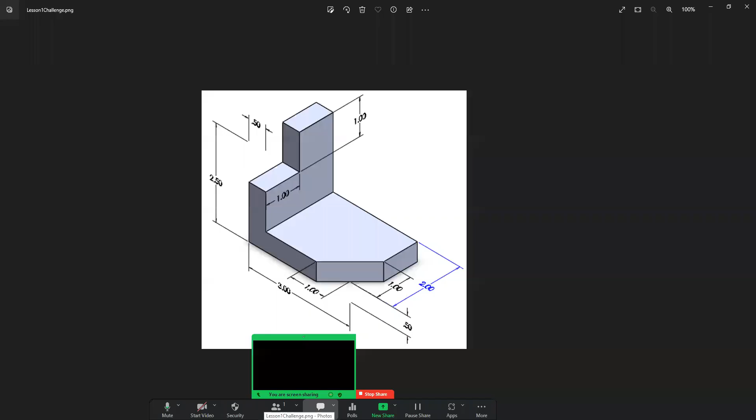First thing we need to do is make a 3x2 rectangle. That's going to make up our base. So we'll just make a new part.

I'm going to go into options. Remember, I always have that issue with ISO and ANSI, so I'm going to change it over to ANSI. All right, now we're good.

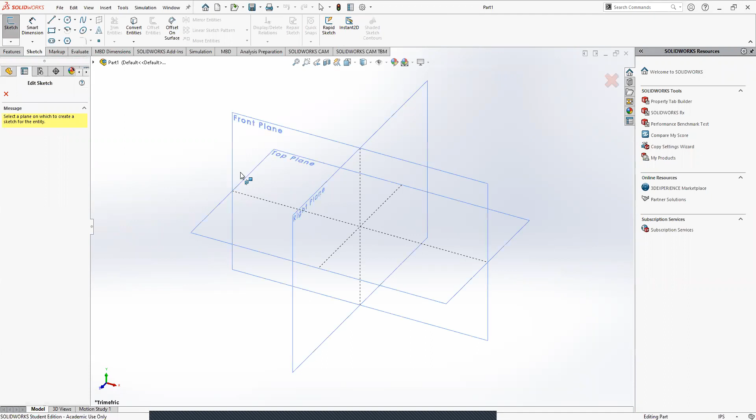So let me start a sketch. This one's the rectangle laying down, so I'm going to make it on the top plane, and when I extrude, it'll look like it's lying down. So it is 3 long, 2 wide.

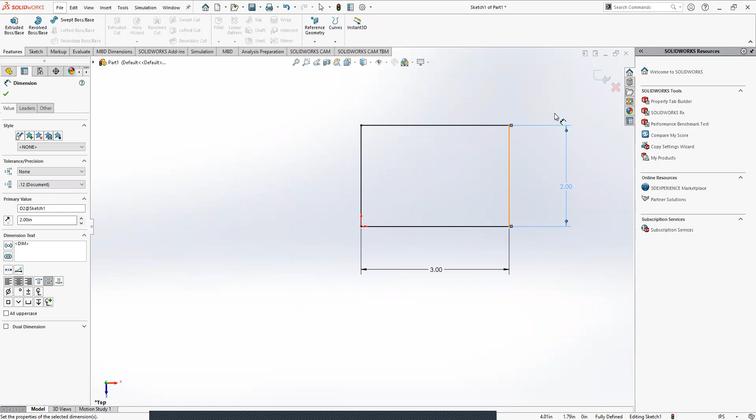Now let me double check how thick I need to make it. All right, looks like I need to make it... oh, notice all my lines are black - that means everything's fully defined. That's good. So now I'm going to extrude it, and I checked it's 1/2 inch thick. All right, there we go. Looks a little thick, let me just check my feature. Nope, that's correct. So there is our bottom rectangle.

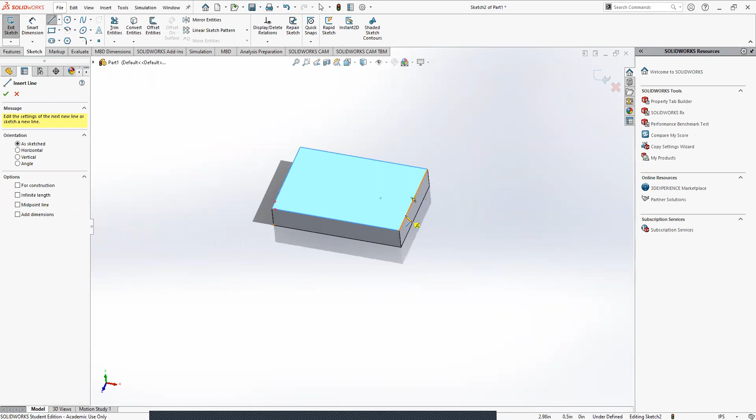So now we need to cut a corner off it. I'm going to go into sketch, make a sketch, and draw a quick triangle here. Notice these two lines are fully defined, so I only have to worry about this one - you can tell because if I move it around, that's the only line that'll move. Let me check the dimensions. Looks like both legs are going to be 1 inch, so that's nice and easy. I'm going to do 1 inch, 1 inch.

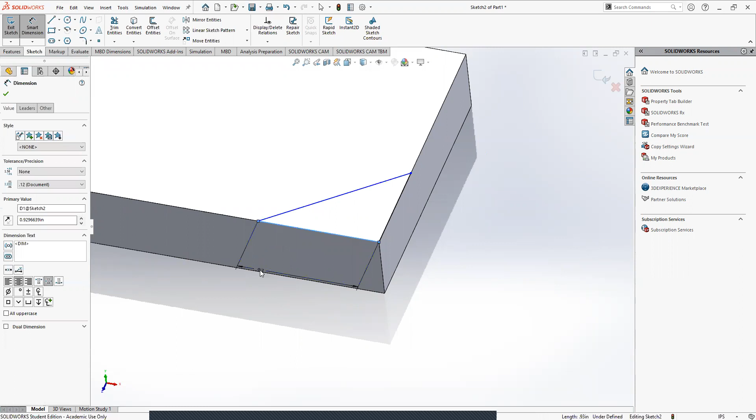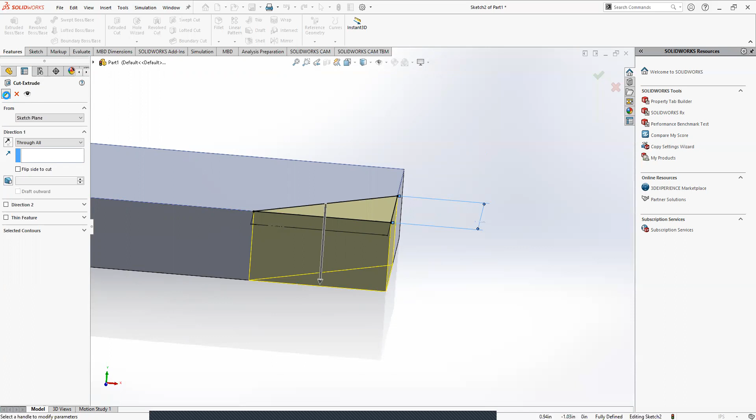Now this I'm going to want to cut, so I'll go to extruded cut. This was 1/2 inch thick, so if I cut it 1/2 inch deep it'll cut through everything. But since I'm cutting through everything, I'm just going to put through all. In this case it doesn't matter, but if you're cutting all the way through something, usually I like to just put through all rather than worry about getting the right distance. All right, now we have a rectangle with a cutoff corner.

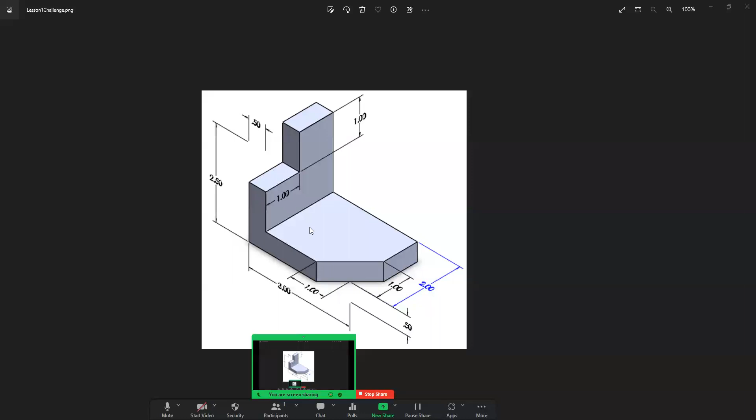Good start. So now we need to worry about that part standing up in the back. Before I start a sketch, I'm going to check on the dimensions. Fortunately, you can't see my screen when I'm looking at it, but it looks like I'm going to need to extrude it - or hold on, we'll do this.

Okay, notice from the bottom to the top it's 2.5 inches. Now this is somewhere you might get messed up, because this part here is already 1/2 inch thick. I plan on starting my sketch on the top of this piece, which means I'm going to need to dimension... well, when I do my extrude this won't matter during the sketch, but once I extrude, I'll be drawing my rectangle from here to here. And when I extrude it, how far do I need to go? I'm not extruding it 2.5 inches because we already have that 1/2 inch offset - I'm only going to be extruding it 2 inches.

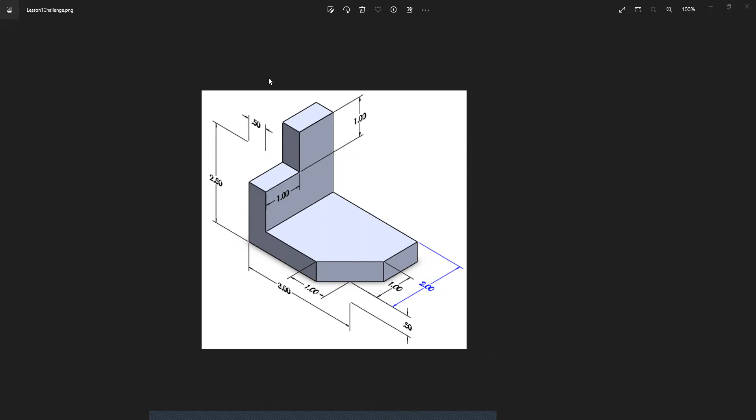So let's kind of look - so it's going to be my rectangle. It looks like it's going to end up being 2 inches across and then a 1/2 inch over this way. Then I'm going to be extruding it up 2. All right, cool.

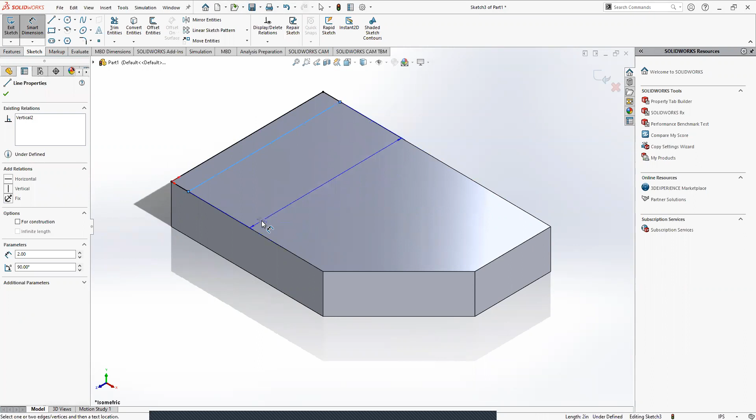So let's go into SolidWorks. Now I can draw the rectangle - it'll make a little more sense what I just said in case you weren't following my mouse. All right, make my little rectangle here. Now let's do our dimension. Notice this guy's already 2 inches because I decided one corner is here and one corner is touching this line, and these lines are already fully defined - we know how long they are.

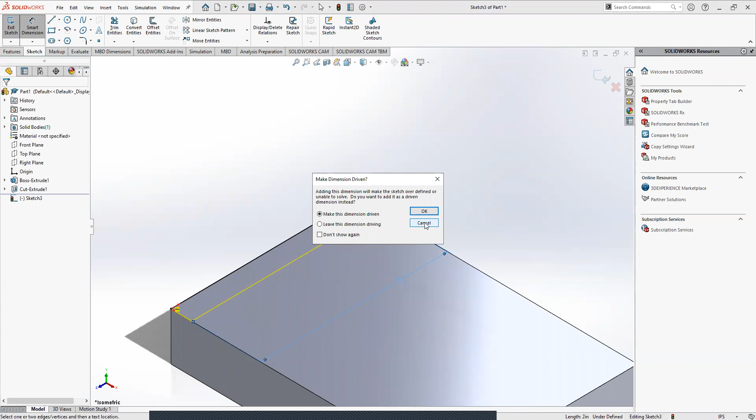What ends up happening is if I try to still dimension it as 2 inches, it says it's going to be over-defined. That basically just means I already had everything fully defined and I'm adding another dimension, and it doesn't like that. So I'm just going to hit cancel and not worry about that for now. But what I do still need to do is define how far apart these two lines are - you can tell because if I try to manipulate this, get rid of that dimension, the only thing I can move is this line back and forth. So that's what I need to dimension, and remember, we already said it's going to be a 1/2 inch thick.

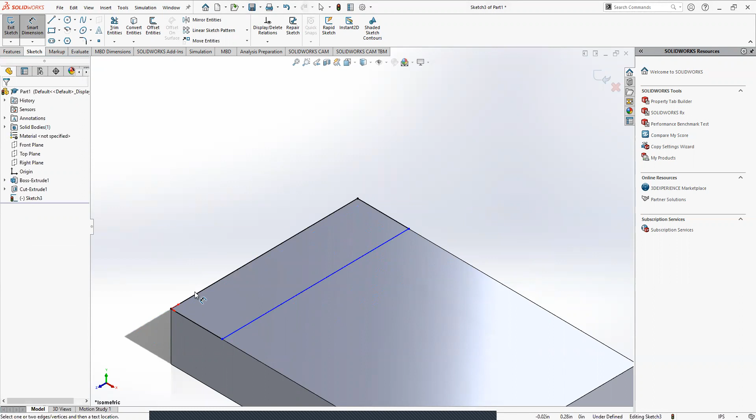So I'll just go line to line. I also could have just clicked on that line and given it a length, but it doesn't matter too much. All right, so 0.5. Now remember what I had said.

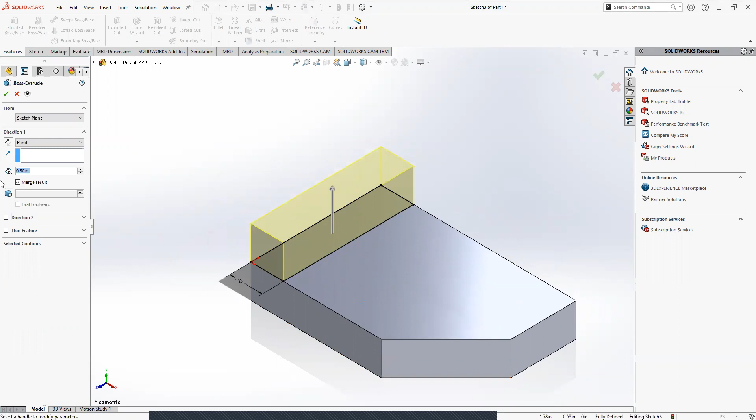From the bottom of everything all the way up to the top, it's 2.5 inches. But since I started from the top and we're already a half inch off the ground, we're only going to extrude 2 inches, right? 2.5 minus a half. So we're going up 2 inches.

Now the last thing we need to do is cut off our corner, the little square cutout. Remember what those dimensions were, that was a 1x1 square, but I'll double check myself just to make sure at the very end.

So I make my quick rectangle. Now remember, I want this corner here, the other corner somewhere out here. I don't know yet, that's why I still need to add my dimensions. So it will be 1 inch by 1 inch.

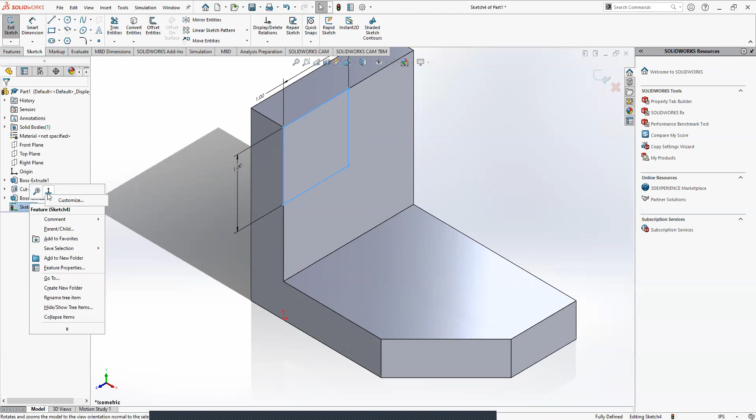Notice when I make a sketch, it doesn't snap to it for me. I kind of went over this in class, I don't know exactly why, but usually it should snap to it for you. If it doesn't and you want it to, which is usually the case, this was kind of simple, I just need to draw a square, so I don't worry about it. But what you can do is right click on your sketch and click 'normal to,' and it'll automatically flip you to face it.

The reason these lines are still blue is because I have the sketch selected over here, so it's highlighted, kind of like if I click this, it'll highlight that. But if I click off everything, I see my lines are fully black. That's good, so now I can do my cut because everything's defined.

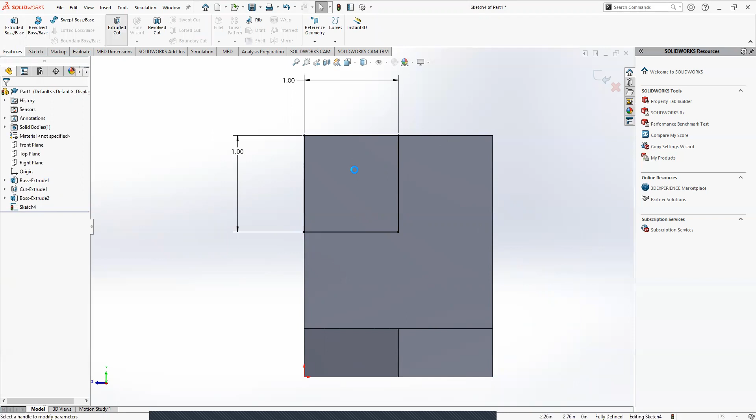Like I said before, cutting through everything, I could just set it to blind and have it a half inch deep or more. This would work too, it's going through it, right? That extra distance isn't hurting anything, but just for consistency, I like to do through all, because that way if I decided to make this wall thicker, I know the cut would still go all the way through, since it's going to go through everything.

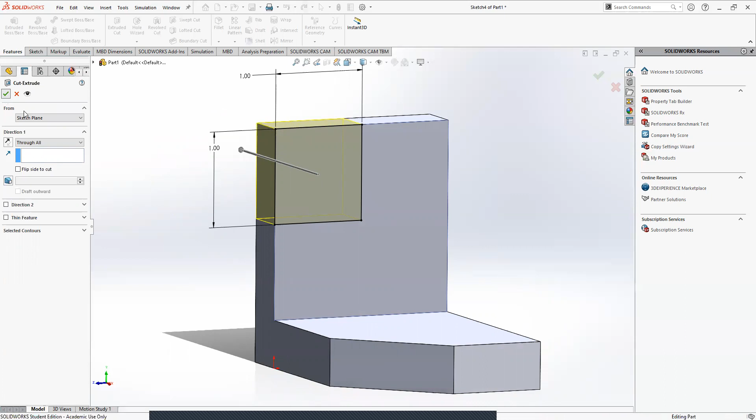So let's say I wanted to make this wall maybe 5 inches thick, I wouldn't have to change my extrude. I could just say through all, no matter what, it's always just going to cut through everything. And there we go. What we can do is hit space and click on isometric, let's take a look at how that looks compared to the other things.

So that's what I made. And here is the drawing. Yeah, the square was 1x1, so I'm fairly certain I got everything right.

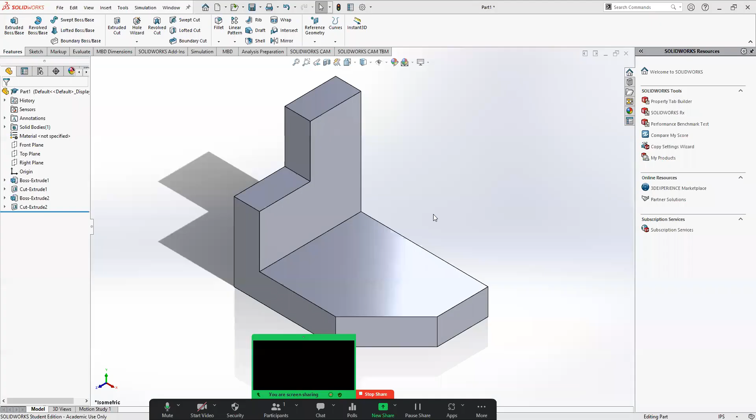It looks pretty good. So I'm going to go back over to SolidWorks and show you a way you can check yourself against mine. Remember how I said in the first lesson, all you're ever going to really need are features and sketch? I'll cover this later on in the class, but a really useful tool is measure.

So if you made one of these and want to check if you're right, go over to evaluate, hit measure. I'm going to give you the areas of a couple of my faces, and this will be a super quick way to check, because if the areas of all your faces line up with mine, you probably got it right. This way you don't have to go through everything to make sure you did it all right. But if you're just curious whether you did everything right, you could do this, and if one of your areas doesn't match up, you probably made a mistake somewhere.

So let's do a quick measure. Here's how you use it: when you click measure, you get a little tape measure. From there you can click on any line or face and it'll give you the length or the area. So I'm going to click on this face, and I get an area of 4.5 inches squared. Perfect, that's really easy to do.

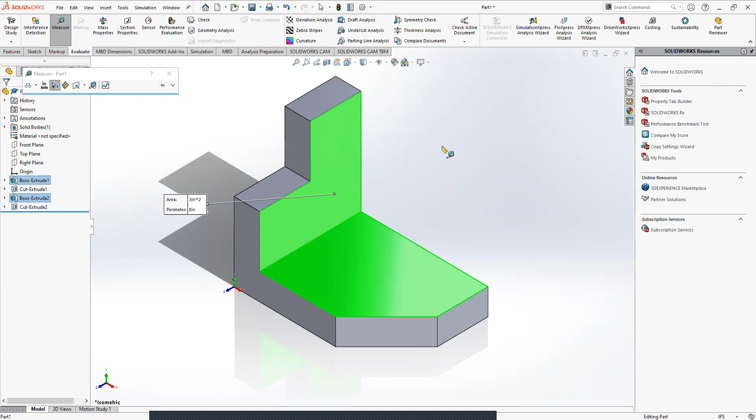Now when I want to deselect it, I can just click on the next face and it'll give me that area too. But see, this one's still kind of selected—if I want to deselect, I just click out into the open, go back here. All right, so the area of this piece here is 3 inches squared. And we'll just do this guy here, that'll be 1.5 inches squared. And then just for ha-has, this guy here is 0.71 inches squared.

So if all of those match up with what you have, chances are yours is perfect. Just use the measure tool, check your areas versus mine, and see if you got it right. But even if you didn't, it's all good—this is all just for practice.